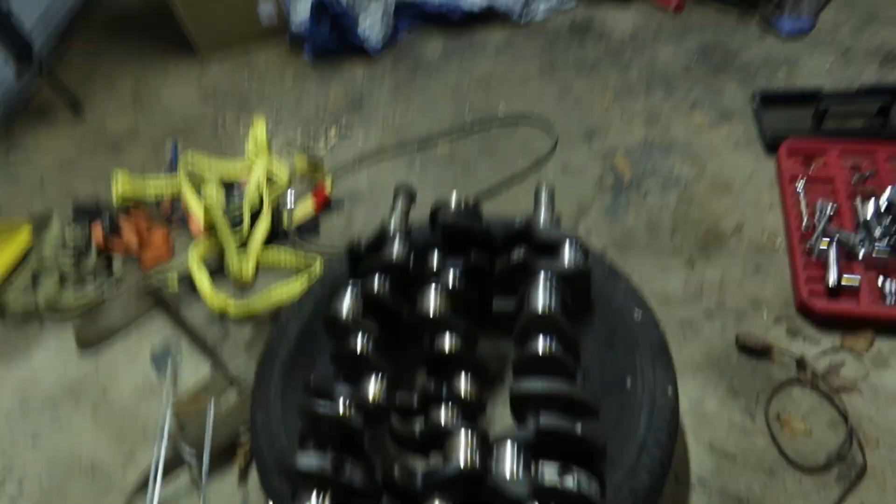Yeah. There's a Foxbody hiding up in that fog. I see it. 5.0 cranks? Does that give you an idea? Told you. We're gonna hang out, gonna watch a movie, gonna take some pictures. All right, let's give them a quick overview of what we're doing and why.

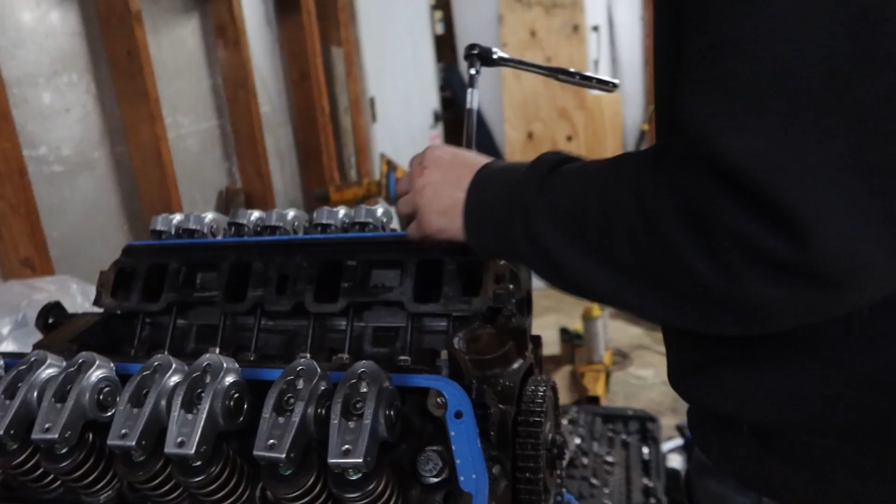Well, let's do a quick overview of the motor, yeah? All right, E-cam, brand new lifters. How long were these push rods? It was like 6. I don't know. Tell them about the heads and why you needed custom push rods. What are they, GT40P heads? Yes. Off the truck? Yes.

We got them heads, Cobra 1.7 ratio rockers, strip flow springs. So I needed custom length push rods to run the bigger rockers, different heads, the double roller timing set. It's all torqued down and ready. Let's come over here.

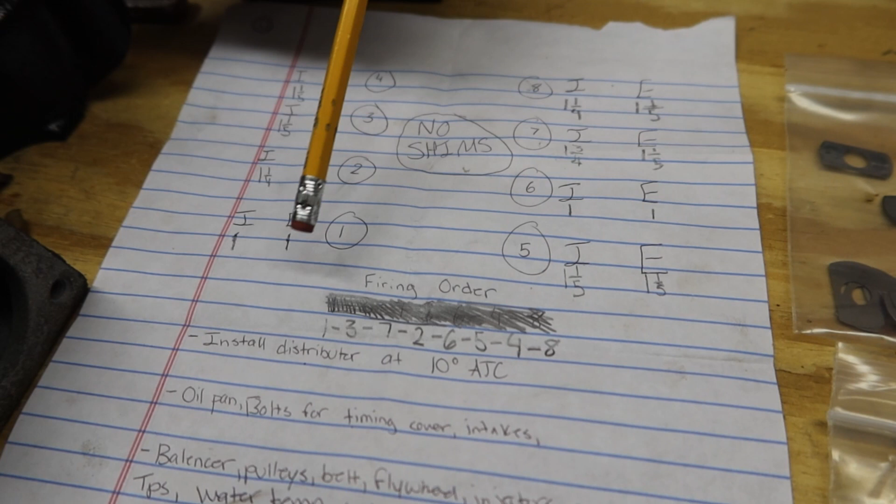A few minutes later. These are each cylinders. They're all 8 cylinders in order, and this is the firing order. So I started at top dead center on the motor, cylinder 1. I torqued the rockers down, and it took about 1 full turn on each valve. Spun the motor 90 degrees. Went to the next cylinder, which is 3. It took about 1 1/5 for both, and then so on, 90 degrees, and keep following the order.

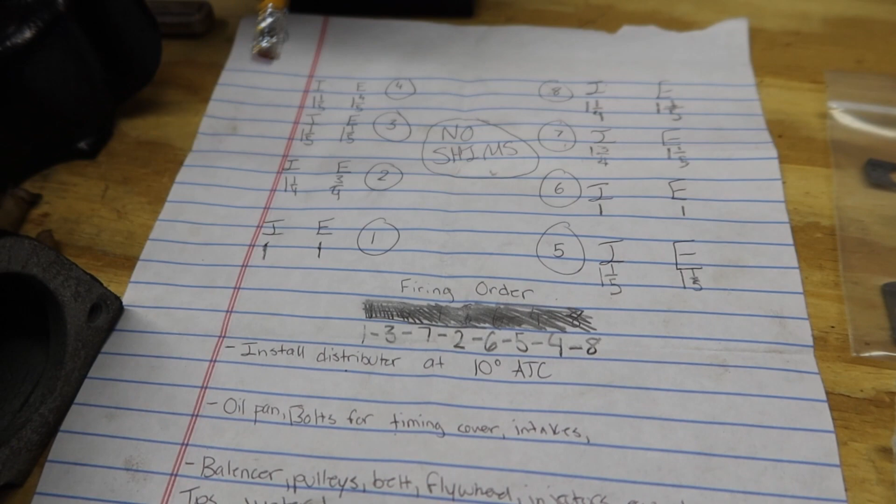And I took note on every single valve. Now I'm about to go through, show them these, and I'm gonna shim all the ones that were over about 3/4 of a turn. That's ideal. What you think? Yeah. That's what you said earlier. And that's the one that was perfect. We don't gotta shim the exhaust valve on cylinder 2 because it was 3/4 of a turn already.

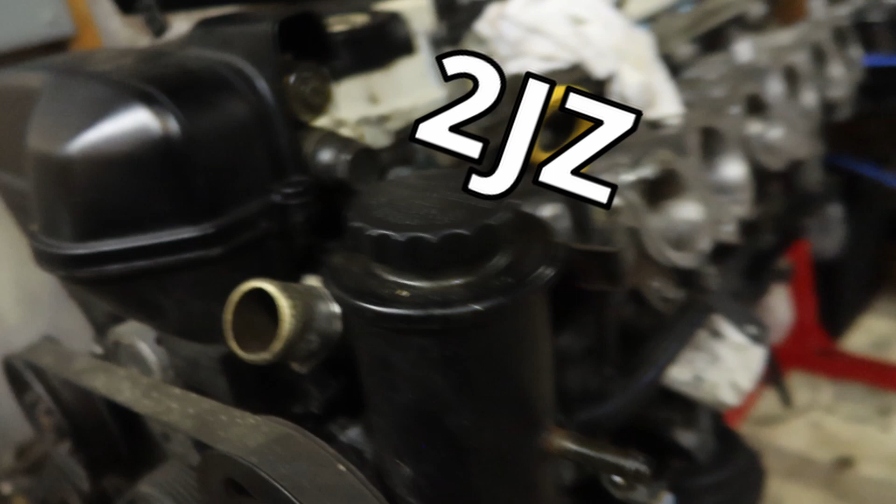I hate my camera. It don't matter that much. Yeah. 2JZ. Poopy. The 2JZ is eventually going to get built with the twin turbo kit for probably the 350Z.

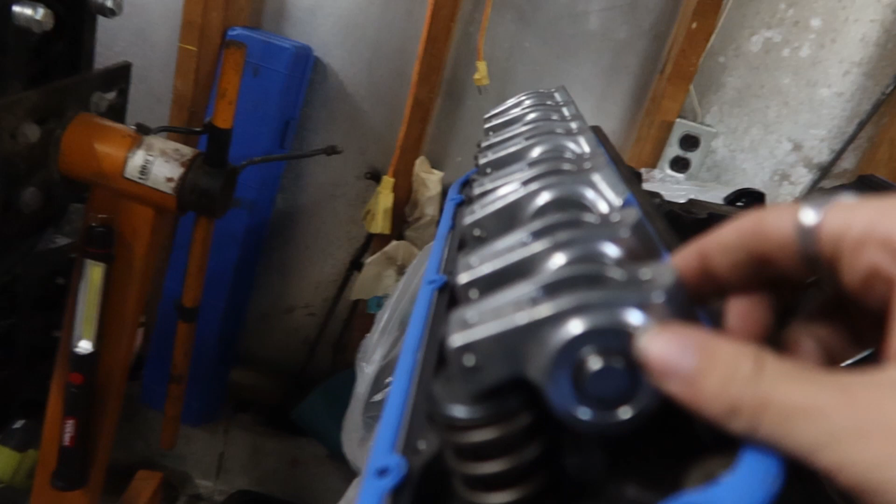That's what we're going to do here real quick. We're loosening all the rockers up so that we can throw some shims up in there and then retorque it and see what we get. And we gotta get it to about 3/4 of a turn. So if we look, this is top dead center on cylinder 1. The piston is all the way up at the top on cylinder 1, which is right there.

And this is the notch for the crank, and that's the mark for the camshaft. Yeah, this is the cam gear. For every one revolution of the camshaft, the crank does 2. That is top dead center though, is what I was explaining. Well, you can go a little bit deeper. When this mark's down here and matched up with it, this is top dead center on the compression stroke. And if the dot was up here, we would be on what they call the overlap stroke.

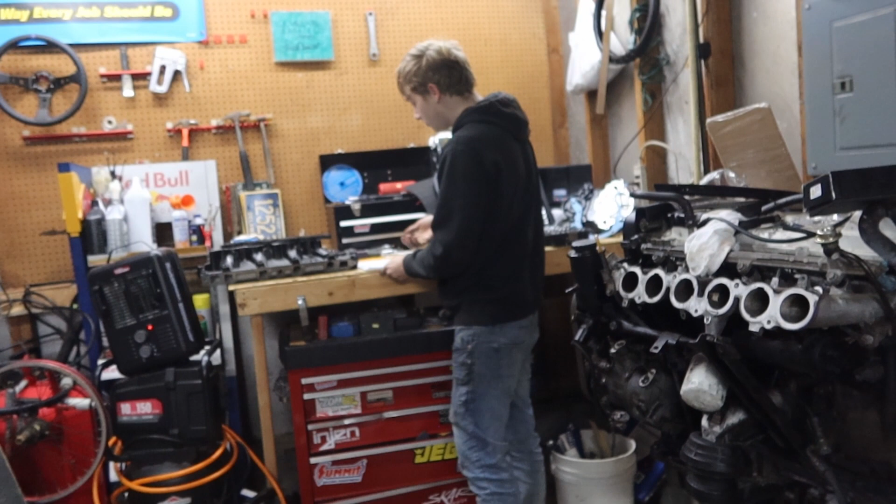You know what we're about to do now? Since cylinder 1 was 1 full turn on each valve, we're going to start with the tiniest shim, which I think is 10 thousandths of an inch. You literally can barely see it on camera. So this 10 thousandths of an inch shim is either going to put us perfectly in spec, or it's going to be just slightly under.

But if it's slightly under, that's not good. I would rather run it at 1 full turn, because that's not too bad. There's some people that don't even torque these things. They just go to 0 lash and then do 1 full turn on the bolt, and they call it good. If that's how they do it and it works, then it works. But I'm gonna go to 20 foot-pounds. This is where you put the shim. There she is in there.

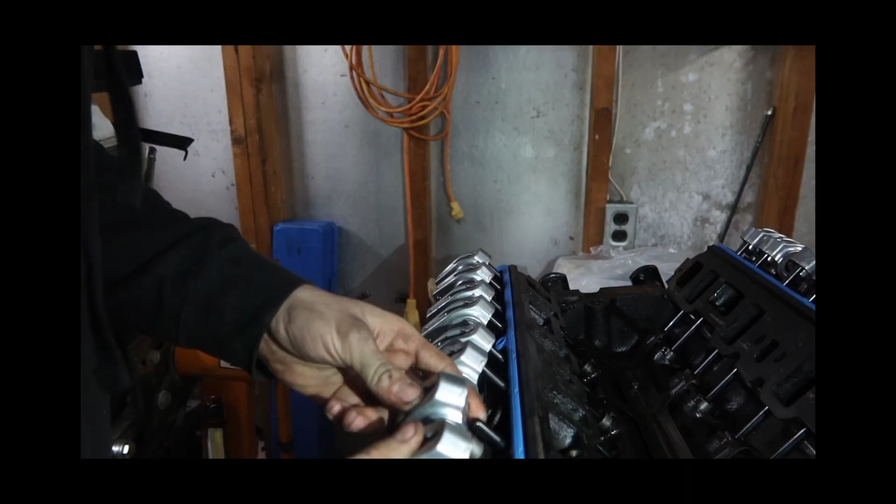God damn the blur. Try to get proper lighting with that. No, it just doesn't want to focus. The screen's blurry as hell. Well, I don't know how to fix that. Me neither. But can you see it? The little thing up in there, it's on both sides. The shim, I think they get it. Alright, ready?

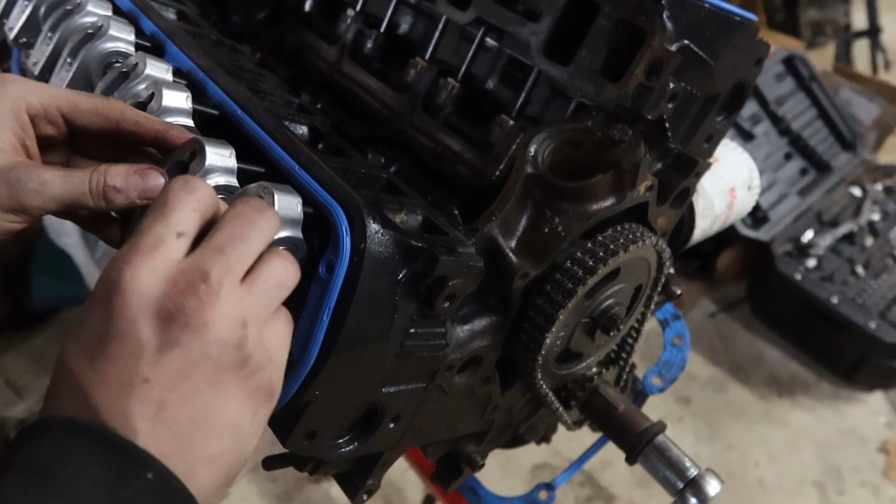Oh, I'm struggling. What's going on? What's going on is we're building a piece of shit. I hope not. Oh, really?

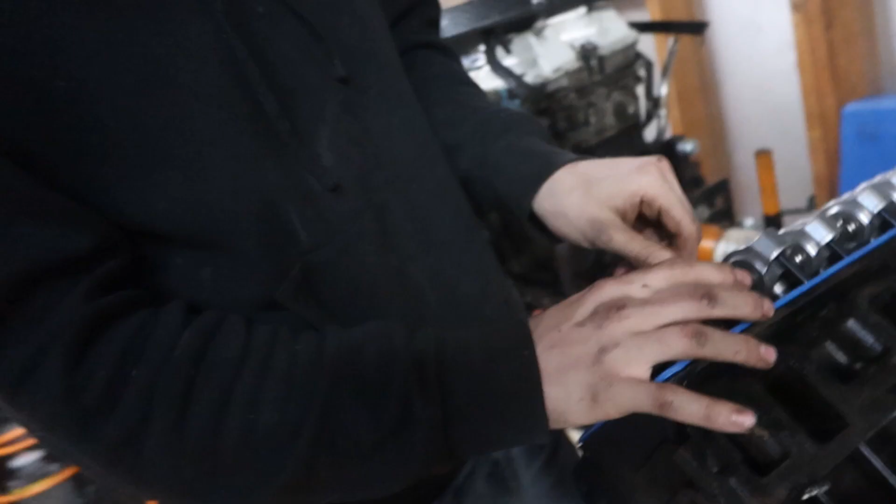This is going in that Foxbody that we were checking out and working on a little bit.

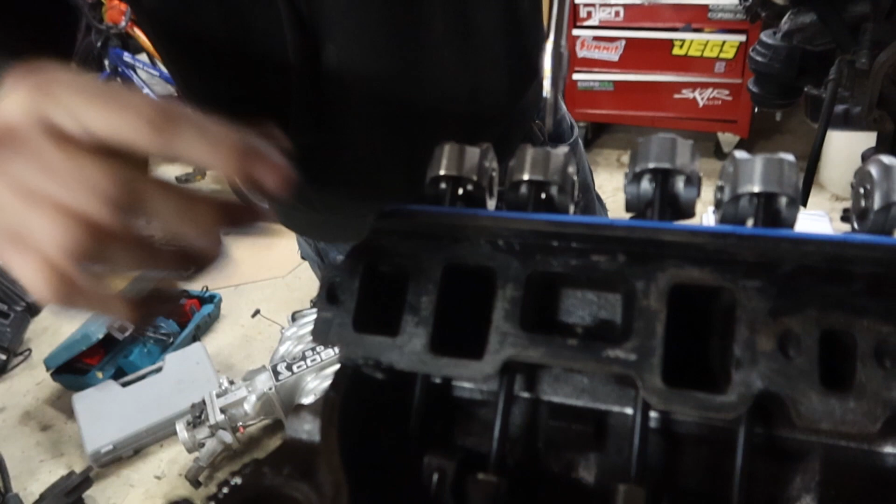Alright, he's getting it to zero lash. So the push rod does not move up and down, but it can be twisted, rotated. Can I show him? Maybe. No up and down movement, but can be rotated.

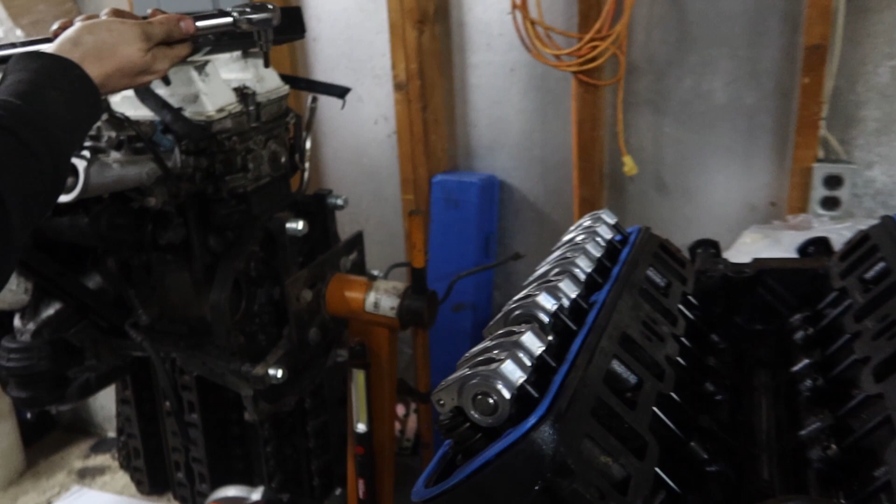Well, I'm ready to torque it. With the poopy fucking torque wrench. It was doing good last time. It don't click like it should. The thing's a tiny little. It should be the loudest fucking click of your life. Alright, look. This is how we set 20. The loudest click of your life. Yeah. 20 foot-pounds, yeah. If that's what torque spec is. I don't know, I'm just guessing. I don't really care. Shut up.

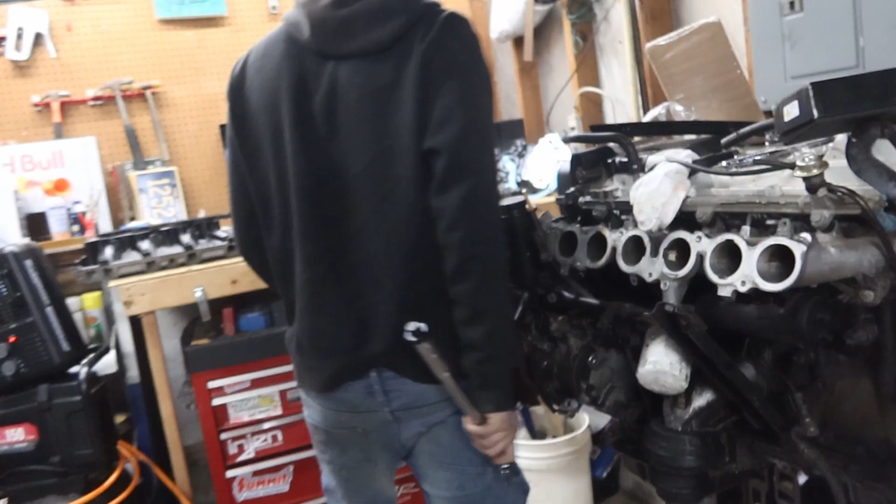We want it to be within a quarter turn. This is scary, man. Alright, ready? Yeah. That is basically 3/4. Yeah. It's 3/4, not a full turn, so that's about perfect. And the rocker is straight on the valve. Now you do the exhaust. 3/4. That's literally perfect. That's ideal. Now I'm gonna check off cylinder 1 because that's perfect.

Yes, sir. We're gonna spin the motor 90 degrees to do cylinder 3 because that's firing order, right? Look. 1, 3. Yeah, cylinder 1, cylinder 3. But watch, this is how I confirm I'm on the compression stroke. Instead of spinning clockwise, I'm gonna go counterclockwise. And we should be able to watch the intake valve open, which it is. You see, it moved down again a little. It's coming back up now, but we gotta come this way. So the intake valve is closing, which means the piston is on its way up.

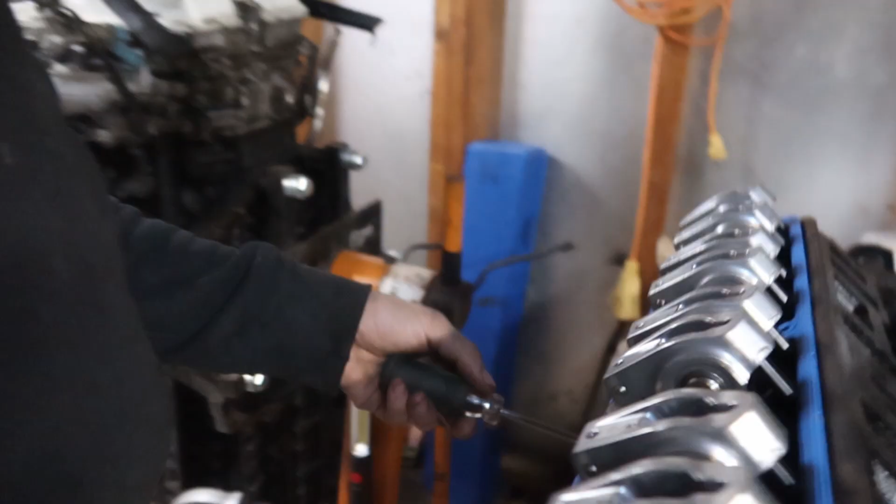And I'm gonna check where it's at now. Where was 90? It was straight up. Alright, so now we gotta go this way. So that's almost 90. Let's see where the piston is. The screwdriver barely goes in, so the piston's almost at the top. Let's spin it a couple more degrees. I think it went down a little bit, so we went past 90. So we back it off a hair, and that's close. That's good enough.

Look at the measurements. It was 1 1/5 on both valves, so I'm gonna go with two 20 thou shims. Yeah, what'd you think? You think that'll work? Yep. You're the mastermind. Extra fifth of a turn. You're the mad scientist here. I'm a fucking genius. Uh-huh. I don't know what you're talking about, G.

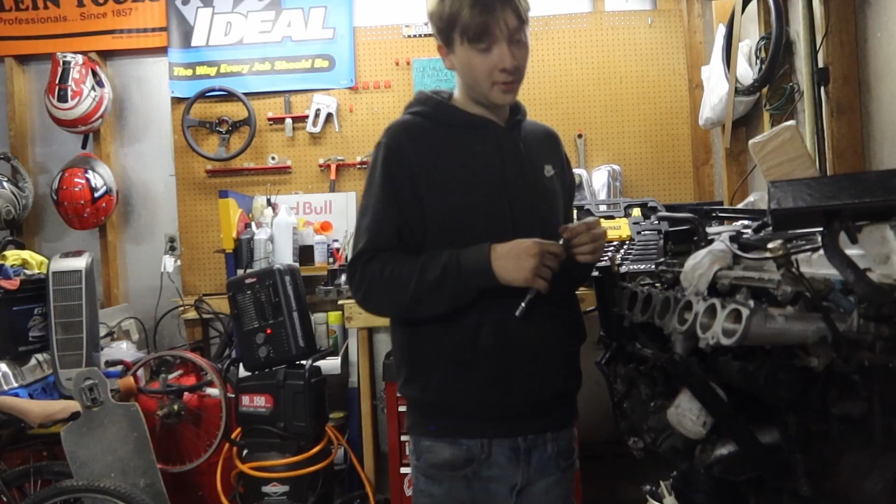You think this motor's gonna be good for about 350 horsepower? You tell me what your guess is. My guess, safely, it'll make 320 to the wheel. A little under 400 to the crank. Well, this is on video, so we'll see. We're gonna get it dynoed one day. Yeah, that's why I said this is on video.

Intake was about 3/4 with the shim. Exhaust was a little under 3/4. Or no, that's exactly 3/4. But you know, actually a little under. Yeah, I was gonna say a little under. It's not straight, so. The other ones was a little past 3/4, but I think that's close enough. Yeah, like under a full turn either way, so. It's ideal. Yeah, fuck it. Next cylinder. I'm gonna check off that one.

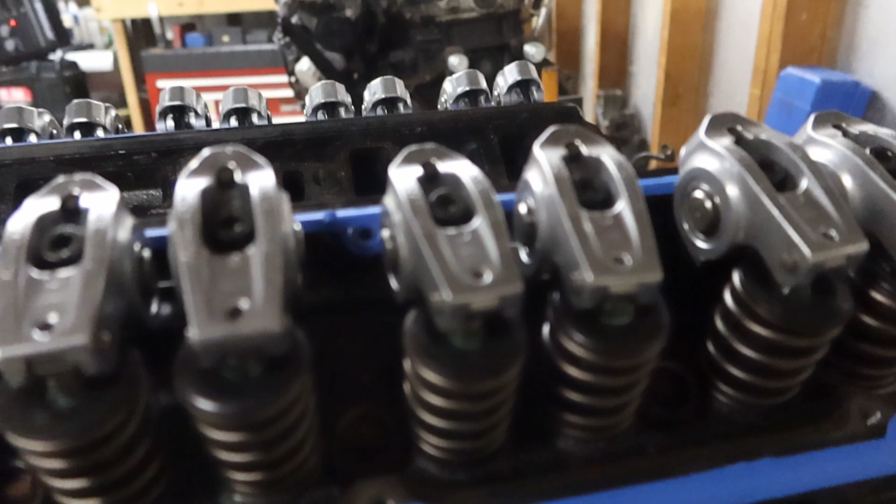See it move. Or I need to back it off this way. We'll be able to watch there. This is exhaust. This is intake. This one should open. Which is. Oh. What was that? You tell me. I think that might have been the push rod shifting. So wait, was this facing up or to the right? I don't remember. We gotta remember that next time. So this must have been where it was. Yeah, I think you're right, because we started up, then we went 90, and now we gotta go down.

It's like right there. Alright, well hold on. Hold it and tell me if it moves at all. Push on it the whole time. No movement? If anything, it like went up a hair. Oh, well, then that's perfect 90 right there. Ready? One more hair. Anything? I think it might have went down. So then I'll back it off a hair. Right there? Yeah. Alright, we're doing it. Just leave it. It's good.

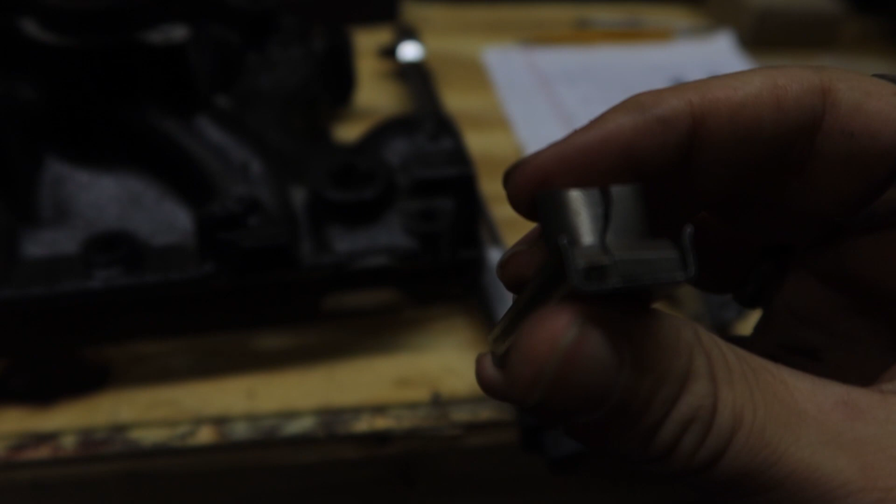We figured out what the noise was. It was not the push rod shifting. Let's see. This is what broke. Straight snapped. It is stuck in there currently. And it was not the push rod shifting. That is what we heard. Yeah, son. I literally don't know where I'm gonna get it from. I got it out. How the fuck, dog? Oh my God.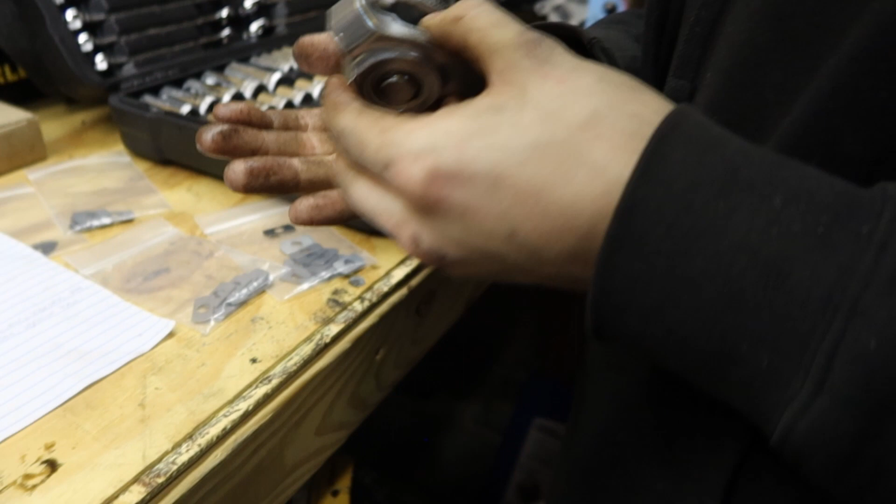Exhaust and intake. Number 7. There's no way. There's no way I just broke another one. Josh. Oh, let's see. Well, it sounded exactly like it did last time. It did sound exactly the same. Why is that happening? Can't handle the smoke. I don't know. I was scared. It literally just broke another one. I know it did.

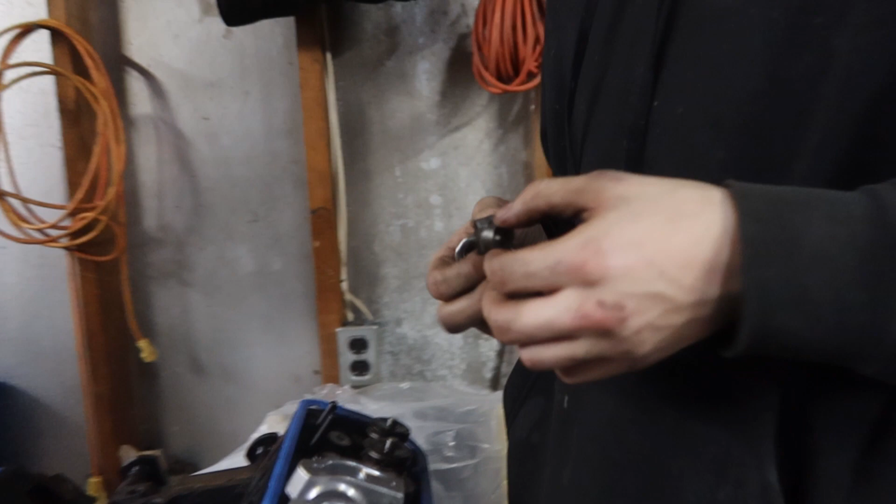Clean in half. That's crazy, bro. How is that happening and only right here? Did that happen on one of these ones over here? No. You sure? No. It's never happened before. Well, we think we know why we fucked up. Oh, I know why. It was the center of the rocker spun the wrong way. I'm not gonna talk about that. So now we have two that are fucked.

About 3/4 of a turn perfectly. Yep. And it didn't. I was scared it was. So cylinder 8 ain't getting torqued down today. But cylinder 7 I would say is good. I think one smaller shim will get us closer to 3/4. Do you have one smaller? Yeah. Three-quarters. Yep, for real, like almost perfect.

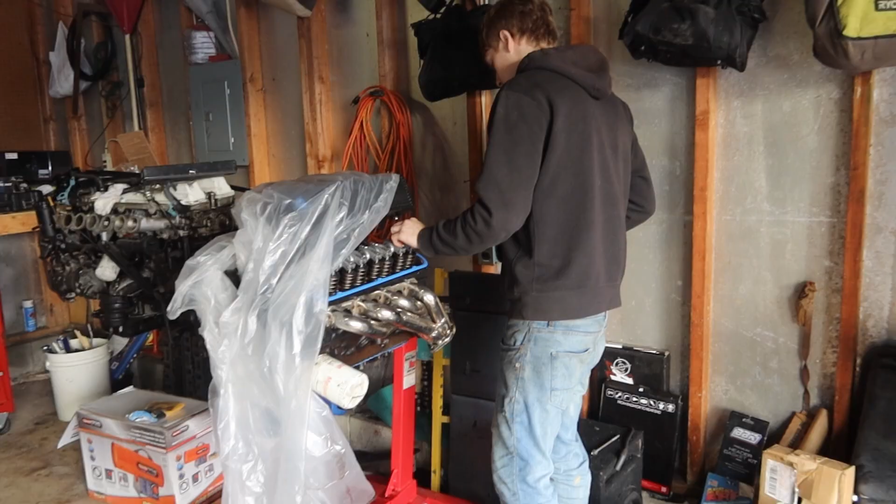Well, this is what we're doing while we wait on rocker seats. These are the ones I'm gonna have to run, but show them this. This is the only spark plug I'm semi-worried about, but when I have the boot on it, it's not touching the header. But it's still pretty close. Show them the squirrely looking headers. When I had them on there, the spark plug was literally touching the pipe, so there's no getting a boot on it. And he's still worried about that spark plug. Let's show him. It's pretty close.

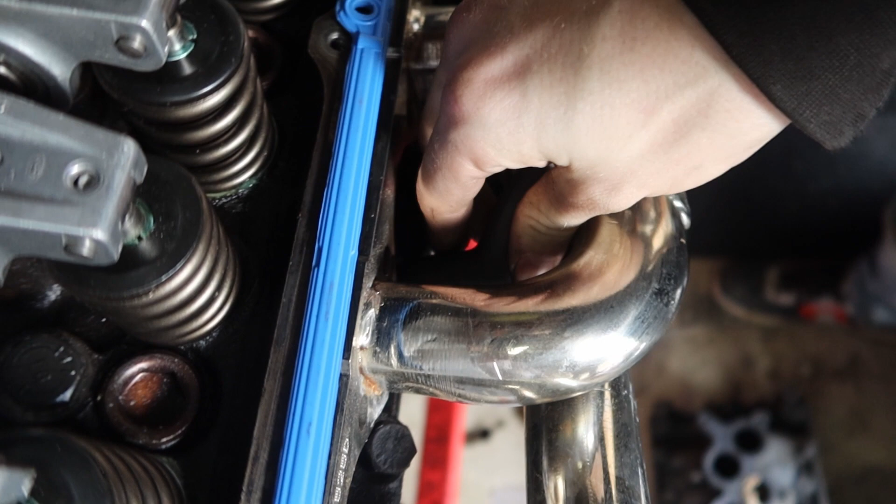That one? This ain't the one. This one. That's not the one you're worried about? Nah, because it has a gap. This one's still close. It is close. Who gives a fuck? Look, you can barely get that one on. That's the problem. It's touching. Is it? So is there a spacer? No, it's not all the way on. Bro, it's not all the way on, I promise. Maybe it is now.

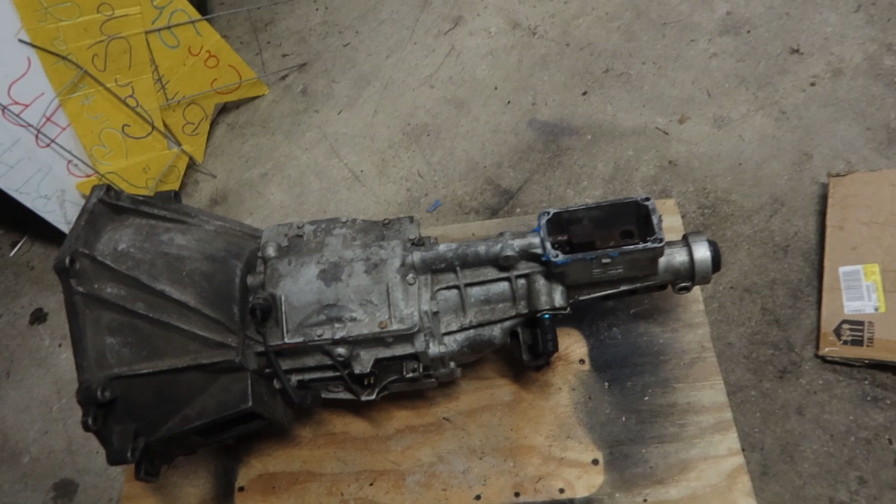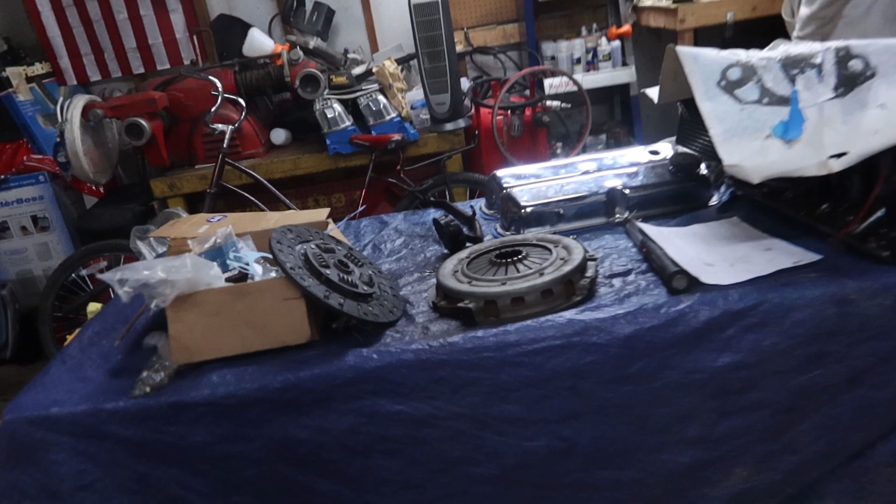Late night. Just got back from picking Shawn up. This here yonder T5 transmission with the bell housing on it. I'll let him get the light out and all that. But we also got the old clutch. Said it was a stage 2. To me it doesn't look aftermarket, but who knows? Yeah, who knows? This don't look stock. Blue. Oh.

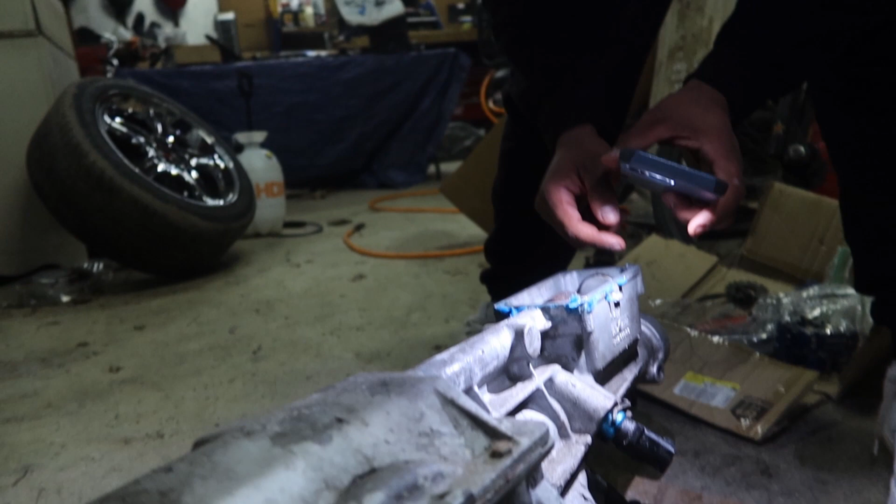Look, he said that was the speed sensor? What is this one? That big plug is a sensor or something. It's been sitting outside for a little bit. You said it was in the shade or something. Look at the front pump. Brand new. How's it get that much rust from just sitting? It's been wet. Shit gets surface rust on it all the time. That's not surface, bro. Look at that.

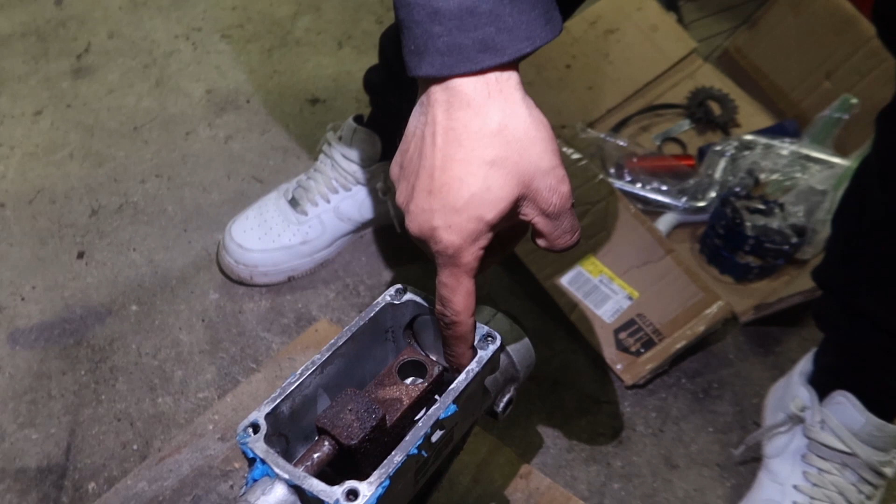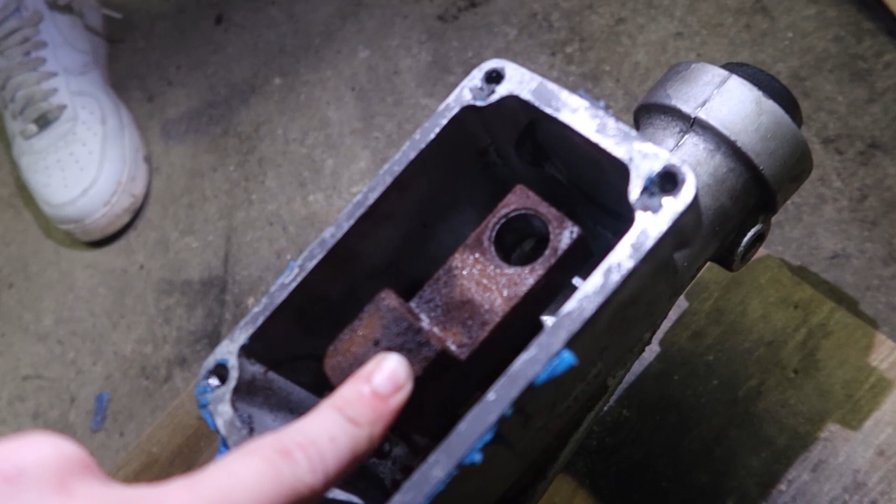You sure? Feel that. Bro, you were just wiping it off with your finger. Look at this one. Feel that. I don't know. It'll come off with a wire brush. Yeah, wire brush it. Look, show them the front pump. Front pump does look new. Bolts are rusty. And then the clutch is over there. How's this seal look? It feels new. I can feel the bushing. Yeah, it looks good.

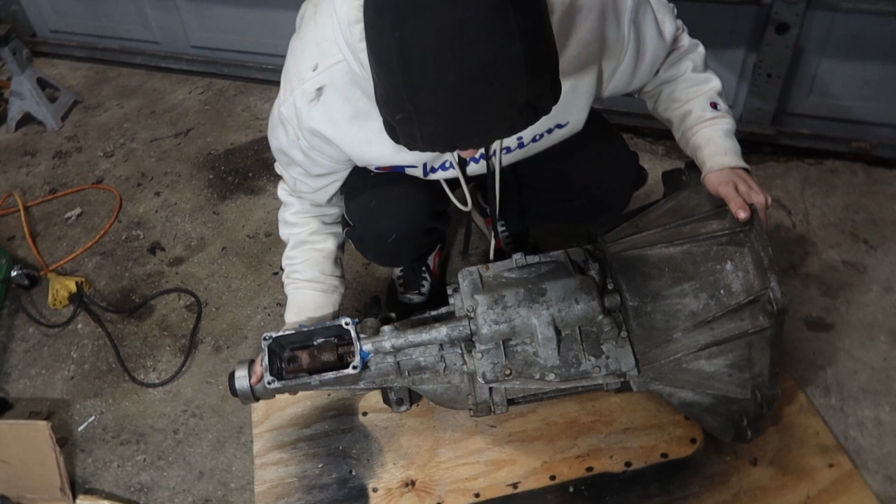Take it to Deltrans and be like, can I walk in the back with one of y'all while you tear it apart? Just let me know everything's good in it. They're gonna be like $10,000. I don't think we're doing this. I'm scared, 'cause seriously, transmissions are fucked. I think we're just gonna send it. That's what I was saying. How do you get a shifter in here? It just sticks in there. That's it. I couldn't tell you, buddy.

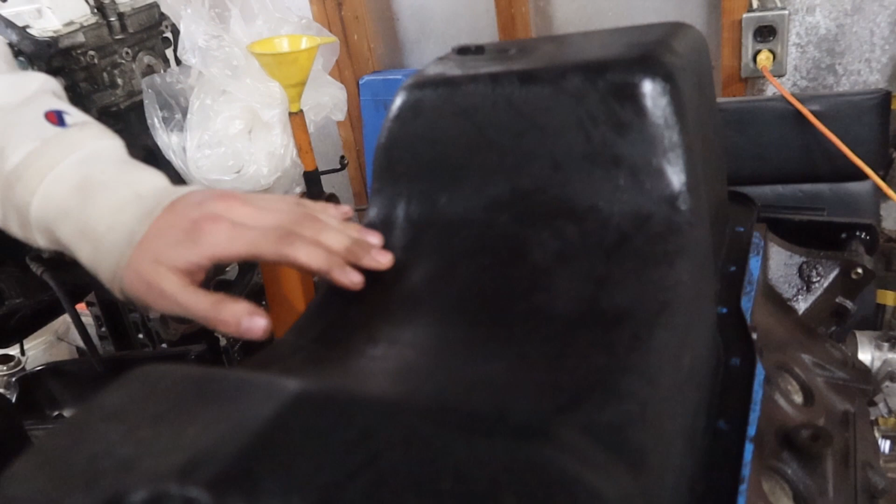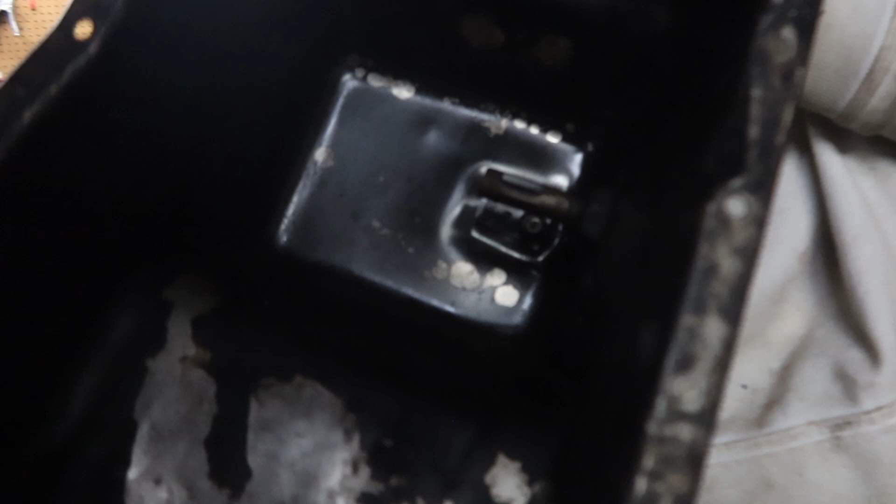We out? Let's look at this pan. You like it? Somebody just got a new dog that keeps barking. It looks good. Yeah, but look, it won't go in place. Why? I don't know. Maybe because of the sensor. Oh my god. Maybe.

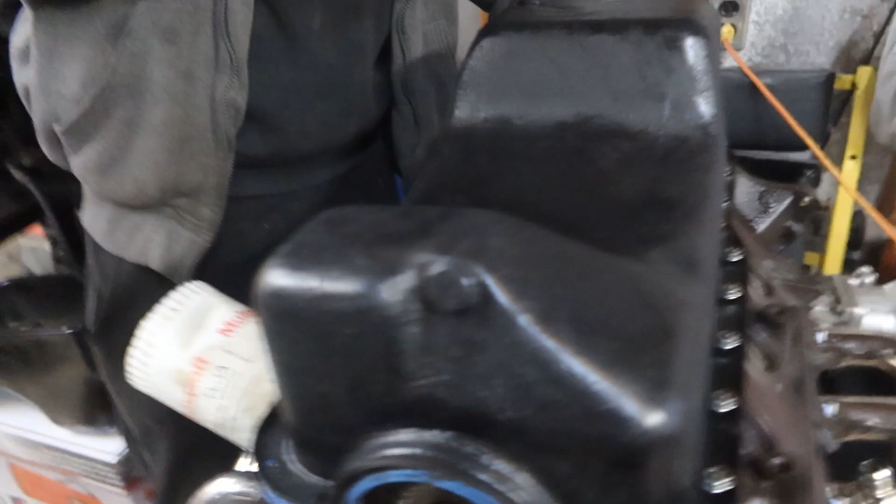It's not the sensor. It's touching. It's wrong. Alright, so we figured out what was going on with this oil pan and why it wasn't going on. And it's because the oil pickup tube we have here, which was another one we just had sitting around, I think this one was probably mine.

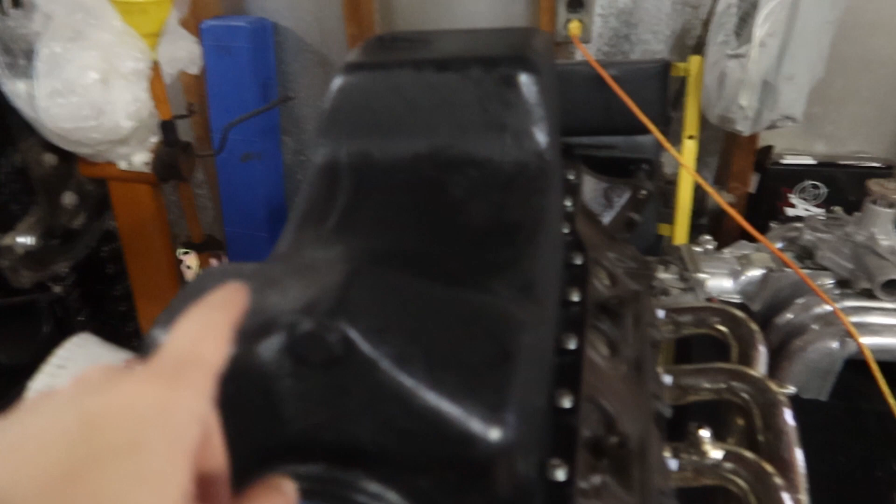It has like a 3-inch bracket here where my thumb is. This thing brings the oil sump down further, probably like 3 inches further into the oil pan. Well, you have to have an aftermarket oil pan or probably an Explorer one or something for that oil pickup tube. But he put the original back on and repainted the oil pan. I cleaned the piss out of it, and this is truck bed liner. Yeah, it looks good. I could have cleaned it up and made it look prettier, but who cares?

Upside down V8. But the headers are facing that way. Yeah, what do we got? What are they? BBK equal length headers there. Not these ones. Oh no, those ones aren't. They just look a little twisted up. These ones are. Yeah.

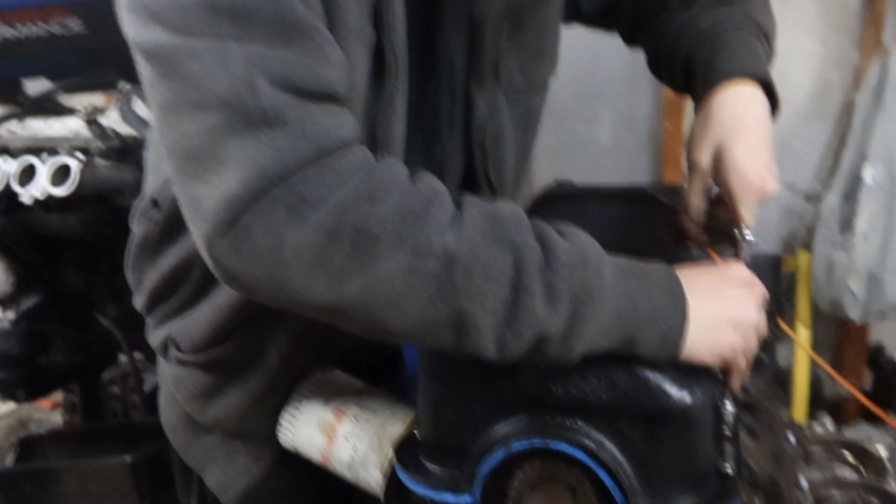GT40P heads, 1.7 ratio roller rockers from the Cobra, E303 cam, Comp Cams dual chain timing set. How do you do this shit? GT40P lower intake, right? Upper too. And upper. They're right there. And I have the Cobra upper, right? Yeah, those are the intakes there. Blacked out, shawty. And that's basically the build, right? Yeah. That's simple enough. Traditional 5.0, you know. Yep.

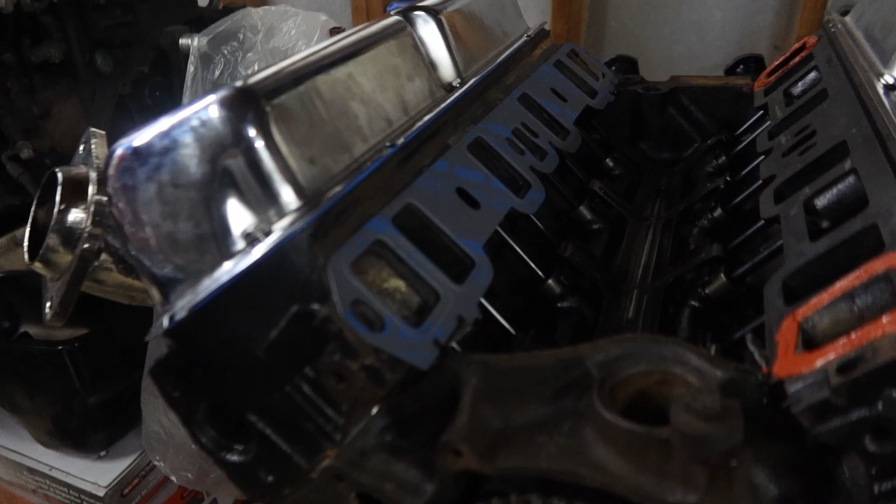Both sides of the rocker arms and both sides of the push rods. And then we put his valve covers on, put the valve cover gasket and then valve cover on. That looks good. Chrome header on chrome valve cover. Black heads. Black oil pan. The oil pan's another thing that we did. Got that all put on. Now we're getting ready to do the intake manifold gaskets. That's what they are, right?

Yeah. Yep. And as doing the gaskets, we're using red Permatex. Only on the intake ports, though. Yeah. No. That was stupid. Only on the coolant ports. We don't want coolant getting in there. In the valley. Listen to Shawn, the doctor.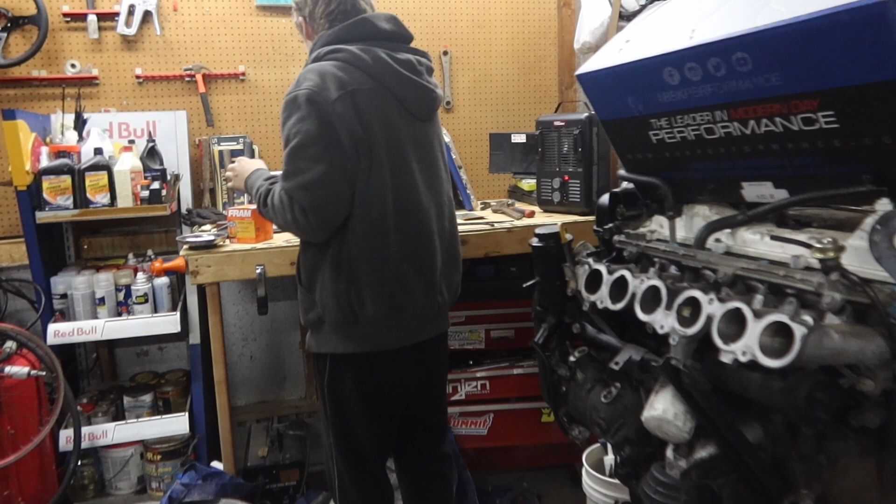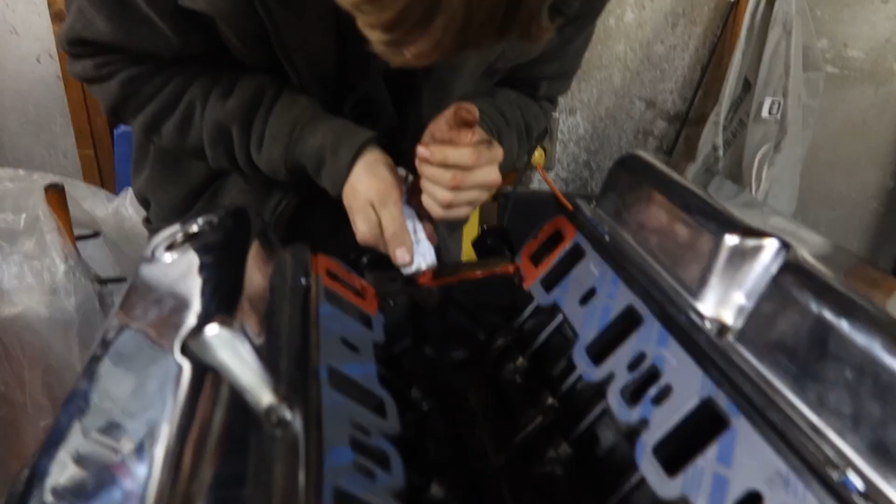We do have a nice little professional setup going on here, though. You know how the boy is. While he's waiting on the RTV, see how this puppy runs, and then we'll build one with forged internals, and then we're building a 2JZ. All I was talking about was the thingy in my pocket.

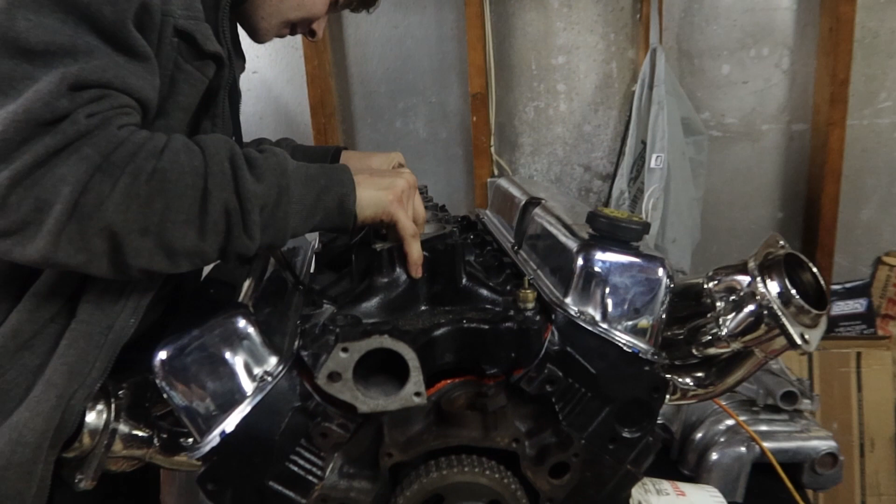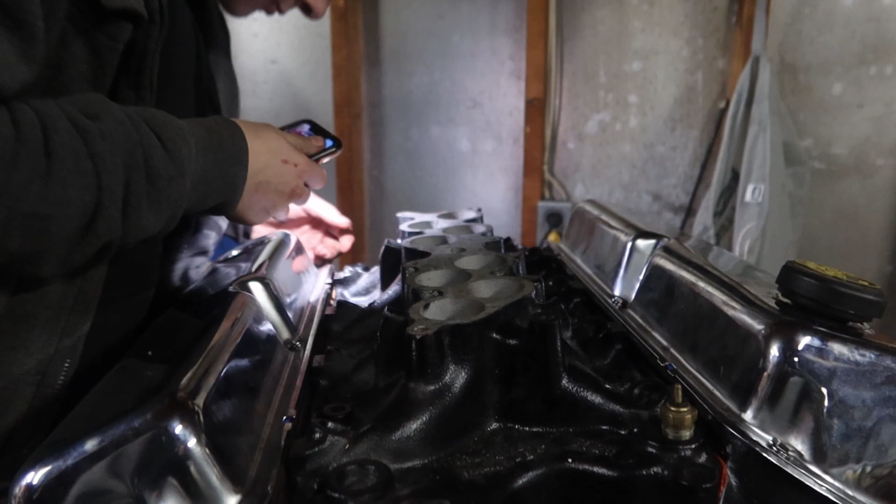Oh no, valve cover. Holy shit, you're right. It's like it's just not even. Oh no, it fits perfect. Bolts and holes. The bolts and holes are lined up. You know what I'm saying?

Alright, so you got them intake bolts, or we need to go through my bolts? Do you have them? If you have lower intake bolts, I'm taking them. I don't know if you will. Thermostat. That's intake bolts. Holy shit. Look. Yeah. A fat kid in a candy shop. Yeah, you're lucky I don't have a block to build right now, for real. I think you just want to see this run. I do, I told you that earlier. We'll just blow it up and then reuse all this for your motor. Alright, well, we're gonna buzz this shit out.

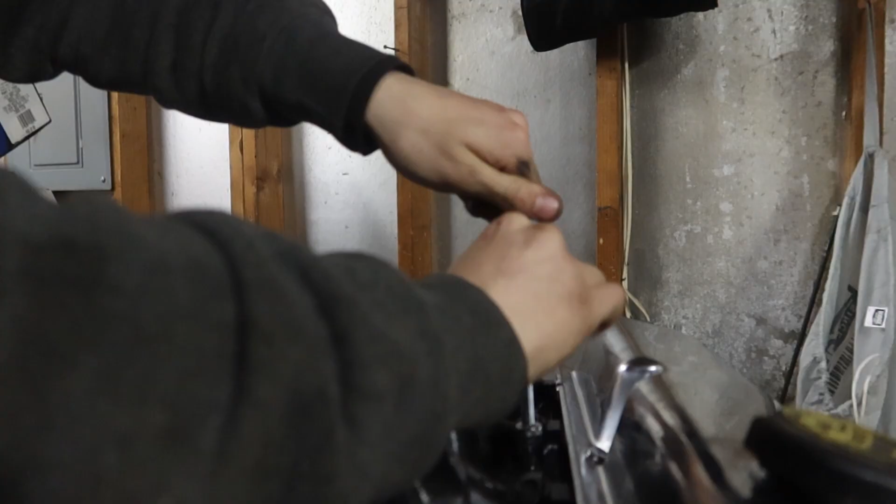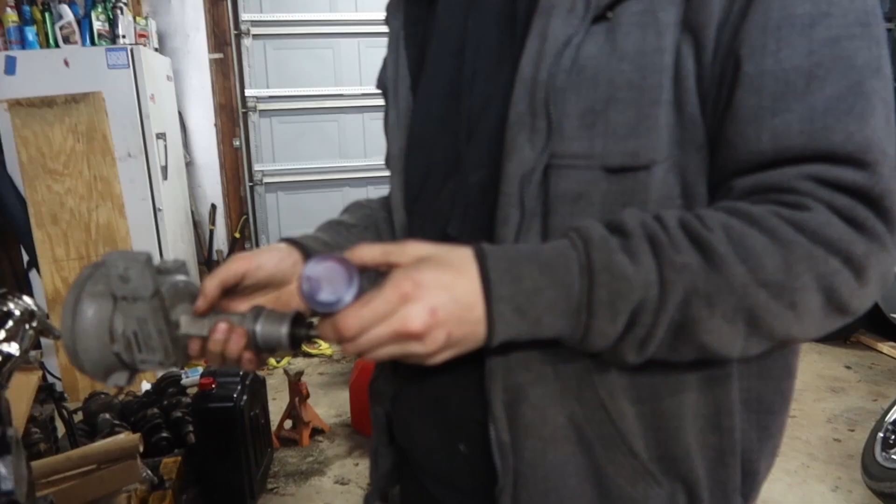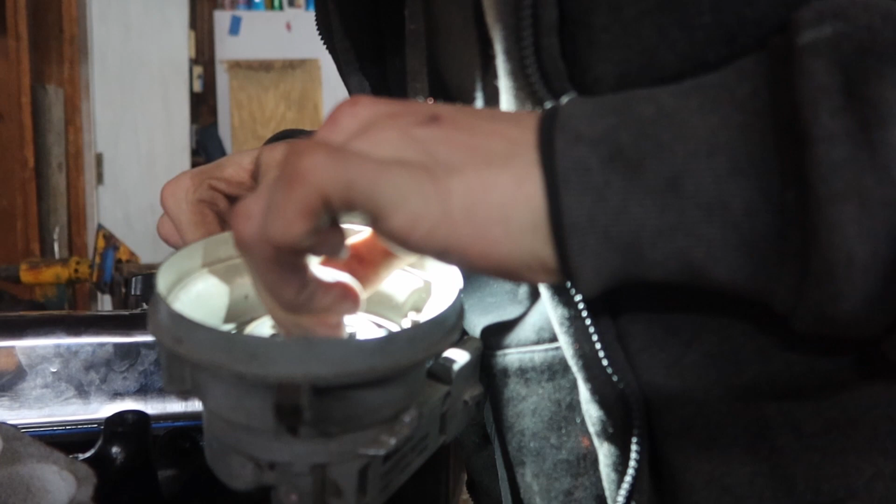Lubing her up before he sticks his shaft in the hole. What? You heard me. Make sure you put it in the right hole. Yep. That motherfucker went in with ease. The timing's not right though. It's gotta come right back out. Alright, so this is all I gotta do. The little tooth has to be with that blue mark, which is cylinder 1.

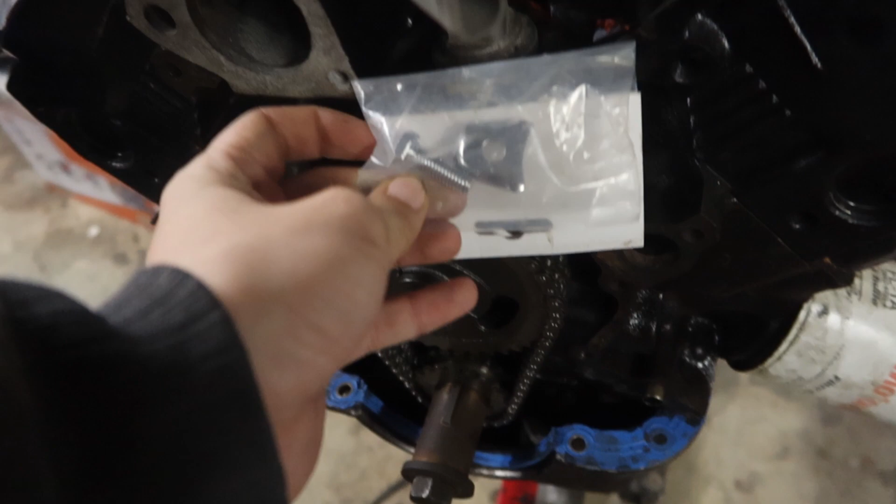Should I give it to him? Like I said, it's gonna be 20 years till mine's done. Well, no, I'm thinking we were struggling to get yours. That's gonna look pretty good right there. I didn't have the cover on, so I was looking. Come here. Why? Come here, dummy. What do you want? Fucking tighten it down, dummy. No. I don't want to use that. I'm gonna owe you so much money. So much money. Just fucking use it. Look at it. It's beautiful, I know.

Yeah, nah, these headers are meant for like Mustang heads. These are the Explorer heads. The spark plug angle's different. I got it. So I'm gonna have to run them like that because I'm not buying new headers. Trying to mock up the timing cover bolts. We need one more shorty one for down here. And then we need the water pump bolts, and then that'll be on. And then we need the upper intake bolts. Then we need to put a harmonic balancer and crank pulley on it.

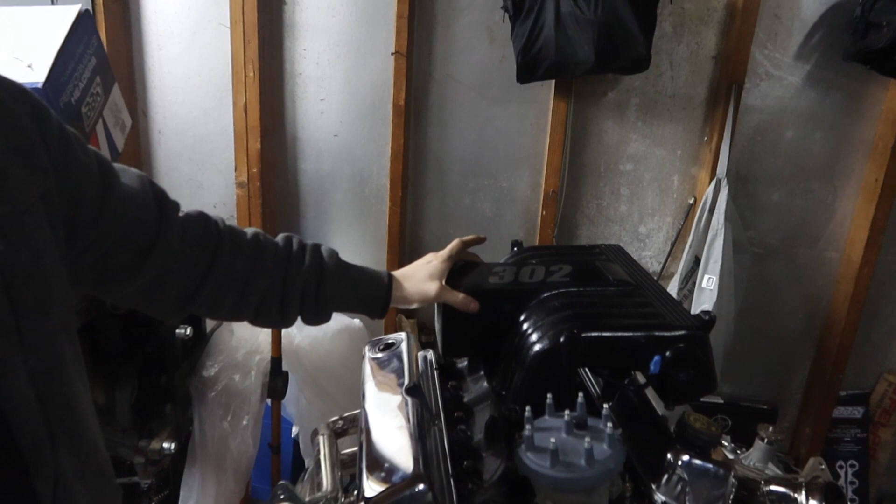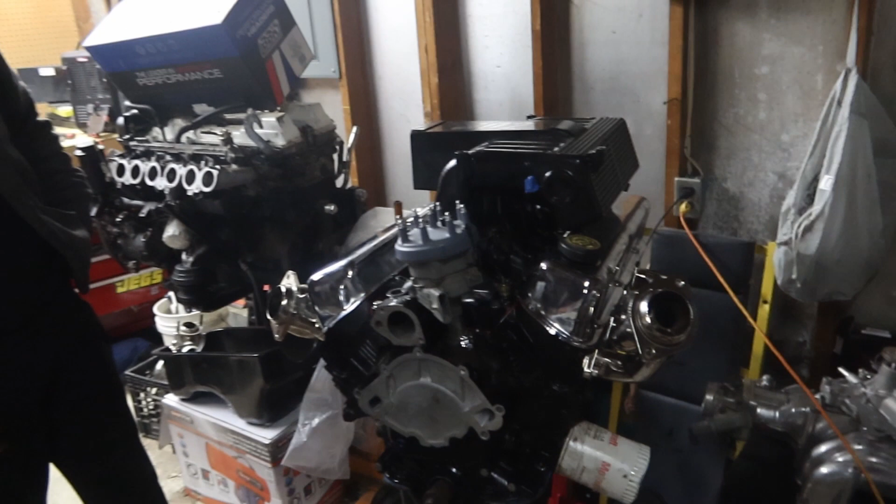Jeez, pretty. Here, let's get a sneak peek. This thing is gonna make it right. It's not straight sitting on the valve cover, but really it would be like that. Yes, sir. You like it? Yes, sir. What should I post it for? 800? 2,500 minimum. I could get 800. Oh my god, yeah. That's all I got into it. You're right. We only got 800 into it. So, it's ugly.